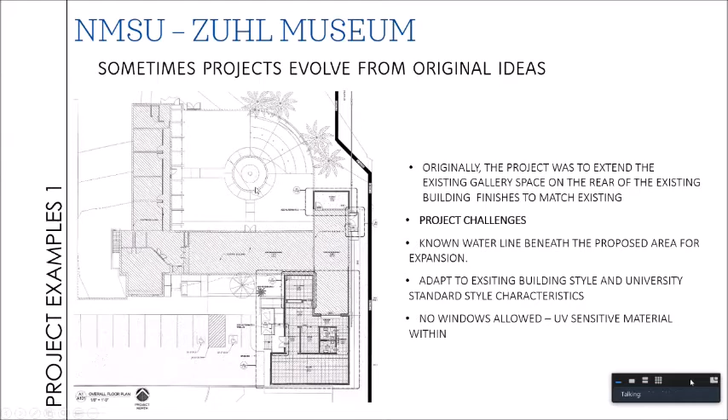Okay, cool. So currently this is the Alumni Visitor Center, and this is the main entrance to the building, in its previous state. Attached to this building, they had built a gallery space for a collection that has been donated to the university on one level or another - that was a lifelong collection of Mr. Herb Zuhl. So the previous condition was that everybody would enter into the Alumni Visitor Center, and there's a table right here at the entrance, and you would tell the person at the table whether you're going into the museum or the Alumni Center.

The curator for the museum had an office detached from the gallery space. So this project started as wanting to extend the gallery space in the rear of the building. They wanted to add square footage to the rear, no real design, just a box attached to the back to increase the amount of display he can have in the facility.

In doing the site analysis, the team figured out there's a 24-inch water main that doglegs and comes across right where they were proposing this addition to occur.

As a designer myself, this took me to the opportunity to propose something as an alternative and put something on the front of the building instead, which was space on the street. The challenges were that it had to adapt to the existing building as part of it, and the existing building was built in the 20s or 30s, so it couldn't be, unless you're Daniel Libeskind, this humongous shard sticking out into the earth.

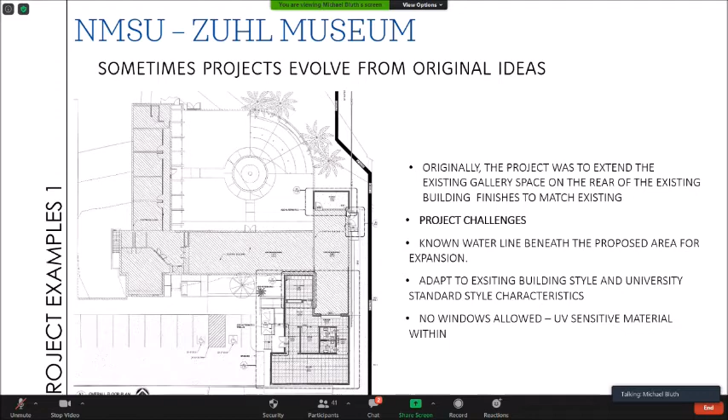As you can see here, I have a picture of the existing facility, the Alumni Visitor Center, with that entrance I mentioned before. There are specific design elements such as this canopy, this trellis canopy, the original clay roof tile with the territorial style fascia.

Taking those design elements and applying them in a more contemporary way to the new portion, we created essentially a box - it's a very boxy addition. However, the characteristics are taken from the fascia added here, the tile added here, and a full tower, which is a very distinctive characteristic at the NMSU campus on pretty much every building.

We weren't allowed to put windows, so we did a little play with the facade to make it look like it had windows. And then we actually utilized the same exact trellis at the entrance area and made it all accessible when it currently wasn't. So now they have their own entrance.

The second project that I'll present is Pete's Patio at University, also within the Corbett Center Student Union building. This was really... let's see, what are our challenges? It's the kitchen to the House Grill eating area at New Mexico State University for students.

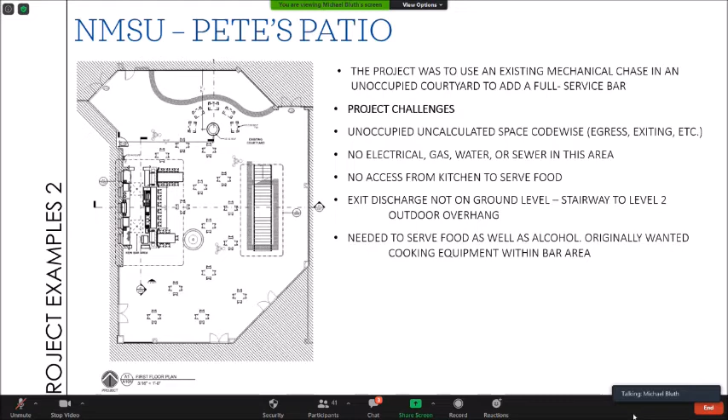So what we decided to do is create a food pass-through. What you're looking at here was a storage closet, and this is the actual dining area. We created an opening with a counter so that servers can come and don't have to go in and out of the kitchen. Here they pick up the food, and then take it out and serve it.

So what we ended up with is a hacienda restaurant outdoor dining experience where you can order alcohol.

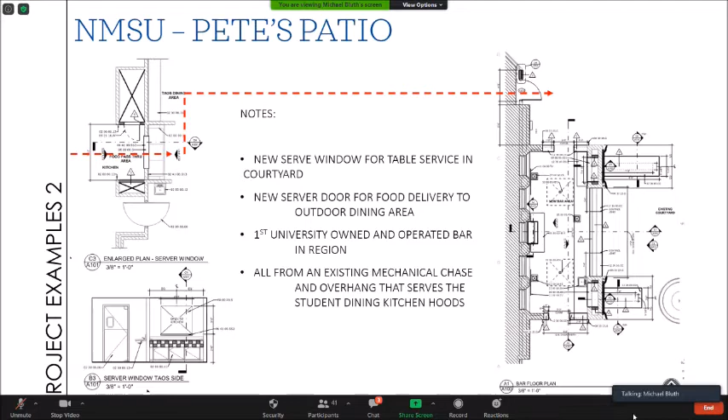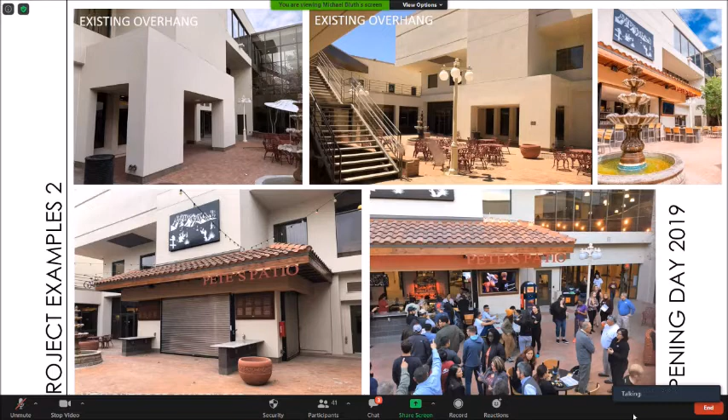The next project I'll talk about is currently under construction. This is the Appaloosa Office Complex, a Design Build venture in partnership with Paso Construction.

We were brought a design challenge. Basically, an owner wanted a higher end look at his new facility that he was going to develop. However, he wanted as little cost increase as possible. So through coordination and teamwork, we developed this idea of utilizing a pre-engineered metal building structure.

So the challenge is, first and foremost, the site orientation constraints. Our owner had very specific orientation requests. He wanted it to face a certain direction, be in a certain location. This project currently under construction is going to be the first of three projects, or three buildings, on the same site.

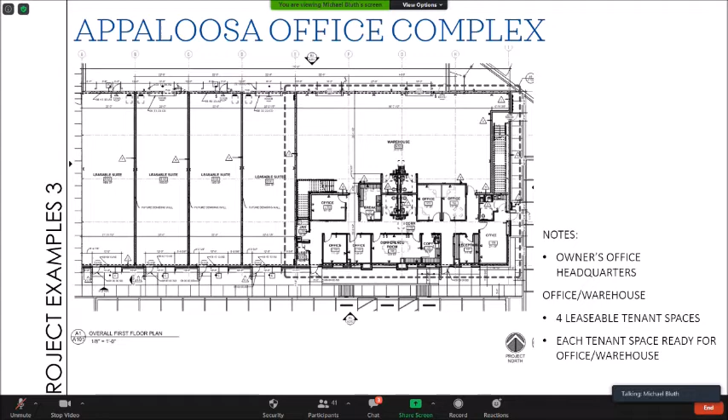And the fourth and final project that I'm going to discuss is a current project that's currently under construction as well.

The purpose of the project is to house a local nonprofit organization's behavioral health in Las Cruces, relocating their headquarters. They had specific requirements, and this one took a lot of research in the sense that we had to look at how behavioral health patients interpret spaces.

So some of them like light, some of them do not like light. There's this whole concept of when there's a window, somebody can see me or somebody can hear me. Another challenge on this project is that every single wall has to be acoustic rated so that you can't hear a conversation from one room to the next.

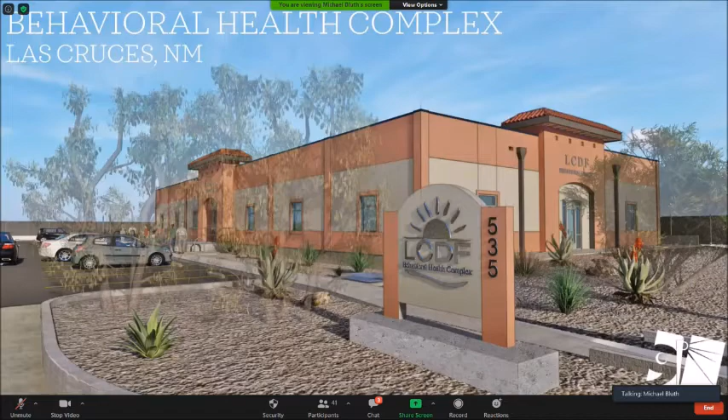One of the major challenges on this building is that it's on a residential street. The street here at the complex front is a residential street. Everything else on this street, there's a church up here and there's an empty lot.

Everything across the street is all residential, so they're all homes. So the city wanted us to make sure that this building doesn't look like a monstrosity, and to try and get characteristics similar to the first project that I showed, to make it fit into its surroundings.

So other challenges on this project: like I said, it has to fit in with the surrounding houses, which are very old New Mexico style houses. The client wanted the building to be as large as it possibly could. So we had specific ponding requirements, setback requirements, in addition to all of these other requirements. And to top that off, they have a very, very strict budget.

What we had to do was separate the building into two separate buildings, basically. This line that you see here is a 2-hour separation that goes from floor all the way through the deck. And this structure itself is independent of this structure in the event of a fire, so that it can collapse separately and it won't collapse the other side.

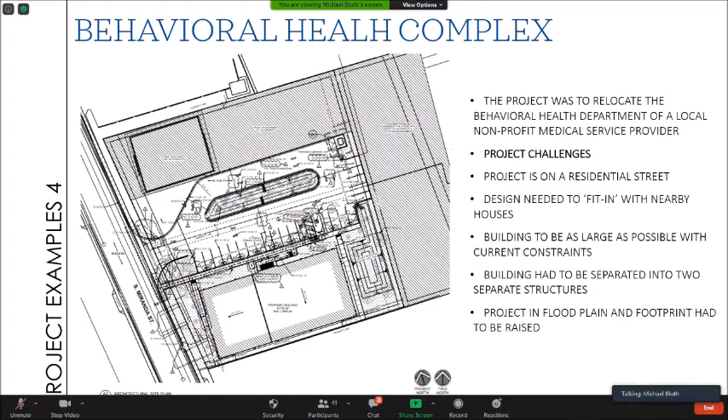Through doing this, we were able to save the client a lot of money by eliminating a fire sprinkler system. Another challenge was that the project is in the floodplain. The entire building footprint had to be raised between 3 and 4 feet. So aside from trying to make it not look monstrous, we had to raise it up 3 feet from street level. So this is basically what it looks like right now.

A little bit to try and make a large building... this is actually a 10,000 square foot building, but it doesn't look like it when you pull up to it. It actually looks fairly small, and it kind of went along with the whole research that we did with behavioral health clients, because some rooms have windows and some don't.

There's a big deal with behavioral health patients as far as if there's windows in the room—some patients prefer to see the daylight, some patients do not. So we had to give them a wide array of different spaces while still meeting their program requirements.

And like I mentioned, the street front elevation is on a residential street. So this 10,000 square foot building now doesn't look so big, and it fits in building style with the buildings that are across the street. It does fit, but we tapered and set the building back purposely so that it doesn't look like it does.

You can see this sidewalk—this is all ADA compliant, so it's less than 2% slope, and it all leads up to the front of the building. So, you know, it is big and it is tall and it is above street level, but there are little cues here that make it not seem that way.

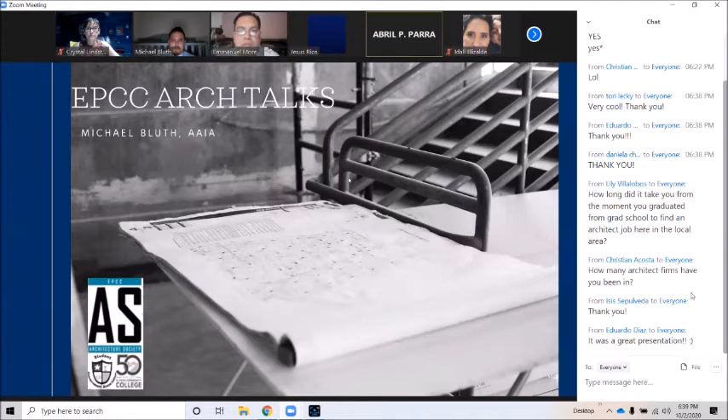I have a question, go ahead. Yes, I'm Jesus Rios, one of your students, Professor Moreno. I appreciated your lecture a lot, and I really liked what you said about loving what you do and finding your strength. For me it's the technical part, floor plans and CAD, and also renderings. So I was going to ask, I know there's a bunch of rendering software we use as students, but with your firm, what do you guys use for renderings?

We use Revit mostly, and we use Lumion for rendering. It really depends, Lumion's a great tool, it's compatible with multiple software platforms and very easy to use. It really depends on what type of rendering we're doing, but Lumion is basically what we start with. Interiors are very hard with Lumion because you get very skewed results, but there are a lot of filters you can apply. So Revit with Lumion is basically our go-to right now.

Okay, thank you. I have a question here from Lily: how long did it take you from the moment you graduated from grad school to find an architecture job here in the local area? So I started working when I finished my bachelor's at Texas Tech, and I worked full-time while doing my master's at Lawrence Tech, which is crazy, I'll tell you. We're talking maybe 2 hours of sleep if you're lucky per night for long periods, then get up and drive. My first job was actually in Las Cruces, so I'd get up in the morning, drive to Las Cruces, work all day, then drive home and do school.

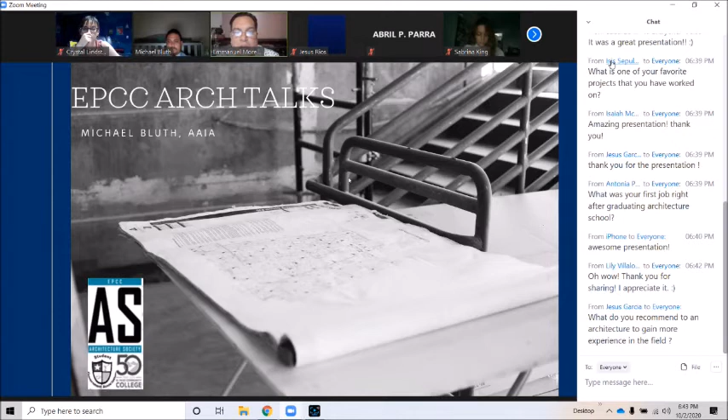Jesus asks, what would you recommend for an architecture student to do to gain more experience in the field?

In the field? Intern, exactly. Go to all of your local architects. I know it's difficult right now, a lot of people are working remotely, but our industry really hasn't taken much of a hit. We're busier now than we were prior to COVID, probably, or as busy at least.

I know a lot of people may not be welcoming to a new face just coming knocking on the door or coming to the office, but get somebody's email, talk to somebody, see if they can refer you, maybe to volunteer, come in a couple hours a day to see how the office runs. That kind of stuff. I mentioned in my presentation to find your niche and what you're good at.

What I did when I finished at EPCC is I spent my summer learning Revit, everything about Revit that I could learn, and that's become my specialty. That's kind of what pushed me to get ahead, and that's why I say to find your niche.

What is it that you're really, really good at? If you have an extensive construction background, there's nothing wrong with going and doing your Master of Construction Management after you finish, and getting into construction management. There's nothing wrong with that. There are so many things we can do with the foundation you're starting with right now. The possibilities are just completely endless.

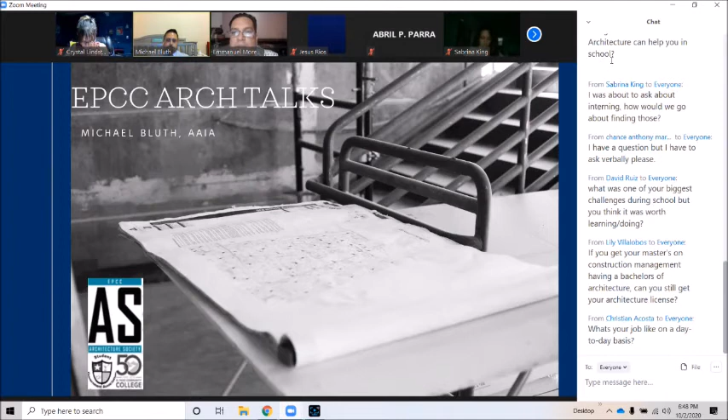If you follow these principles that I've presented in this lecture, and you've made a name for yourself as, say, somebody who does kick-ass rendering, somewhere down the line someone who knows who you are may extend an offer to you or something like that.

But for anybody, I would say find out who your contacts are. Contact somebody, send an email, call firms. Look up firms and say, hey, I'm a student, I'm at this level, I'm looking to intern, I'll do it for free if you want. In all seriousness, that's how you get your name known.

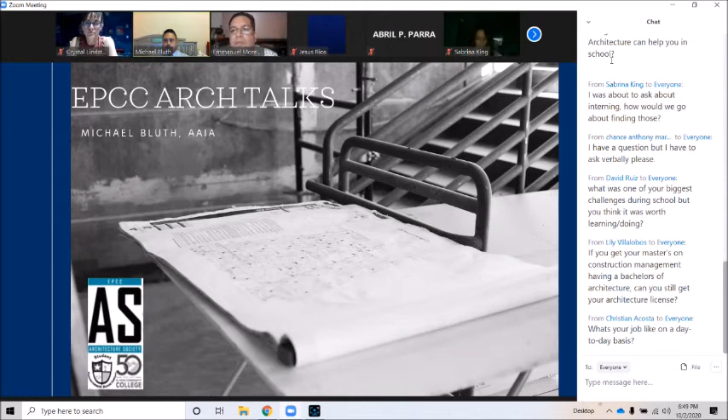You get to know people. They give you a chance, even if it's for a summer. We've had high school students come intern, kind of a shadowing type of thing. I'm sure every firm in town does things like that, especially with somebody who has an architecture background and is passionate about it. You may start as an intern, come back every summer till you graduate, and pretty much everybody knows what you can do. You're a big help in the office, and who knows, maybe you're offered a job permanently, based on what you've done.

So Chance wants to ask the question in person. Go ahead, Chance. I'm very interested in your last example with the health facility, where you said you had a difficult time designing the building to fit its surroundings in a residential area. My question is, do you believe other architecture firms face that same situation trying to fit a facility? Because I live on the west side of town of El Paso, and there are facilities right in the center of residential homes that are modern design. Is there a situation they try to develop, and what's the solution for it?

A lot of cities and municipalities have their own design standards, districts, overlay districts, and specific design standards that us as designers have to follow. To what extent is up to the city. They're the ones that approve our drawings and our designs. We have to present to boards, we have to do a lot of presentations, just like what you do in school. It's the same thing, you defend your design, that kind of stuff.

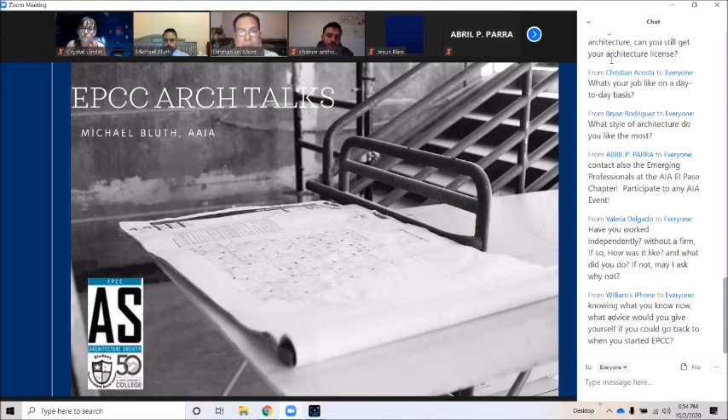The next question, I think, is more of a question - if you want to jump in, you can. I think it's more of a professor's question here.

The question is, if you get a master's in construction management with a bachelor's of architecture, do you still get your license? The answer is yes, but you have to be careful with that because it's a bachelor's of architecture. The Texas Tech program here has a bachelor's of science in architecture, which still requires you to have a master's in architecture. After that, you can get as many degrees as you want. Santiago Calatrava has a degree in civil engineering and a degree in anatomy, so never limit yourself to the kind of education that you get.

Correct. I'm going to jump over to Valeria here. She asked, have you worked independently without a firm? If so, how was it like, and what did you do?

Yes and no. On a professional level, doing freelance rendering and modeling, I worked with some local real estate people who have a drawing and a proposal, and they want to get a tenant in there and see what the building's going to look like with the potential tenant signage. One was like Dunkin' Donuts, another was Papa Burgers, that kind of stuff - basically modeling the building and putting that together. I also worked on a proposal for a residential project on my own.